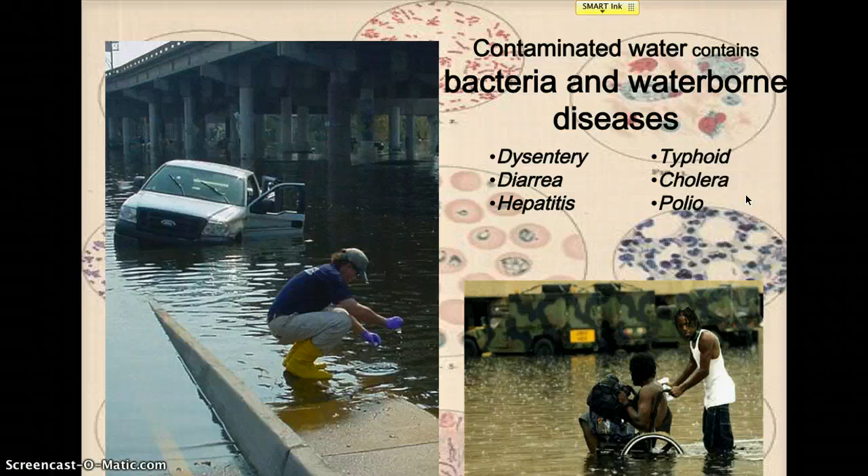And when you've got contaminated water, you've got problems that we're not so familiar with here in the first world. You've got dysentery. I guess we're familiar with diarrhea, hopefully not too familiar, but other places, diarrhea can kill you. All these waterborne diseases, you want to jot this down in your Cornell notes: typhoid, cholera, polio. You can get epidemics, and so we don't really hear about those too much here, but in other places they're killers, and they could easily be avoided.

So why do we need to treat the water? We've got public health issues. We want to be able to go use the water. We want to not be afraid of it. We've got protection of wildlife and ecosystems, and then especially this idea that water can be recycled.

We are scarce on water. We've got a growing population and growing demands for water, and we need to be smart about how we use it. It's like, should we be using Hetch Hetchy drinking water to water a golf course or a park or landscaping? And so maybe there's some ways we can reroute that water. And so the purple pipes are kind of the symbol around here for recycled water.

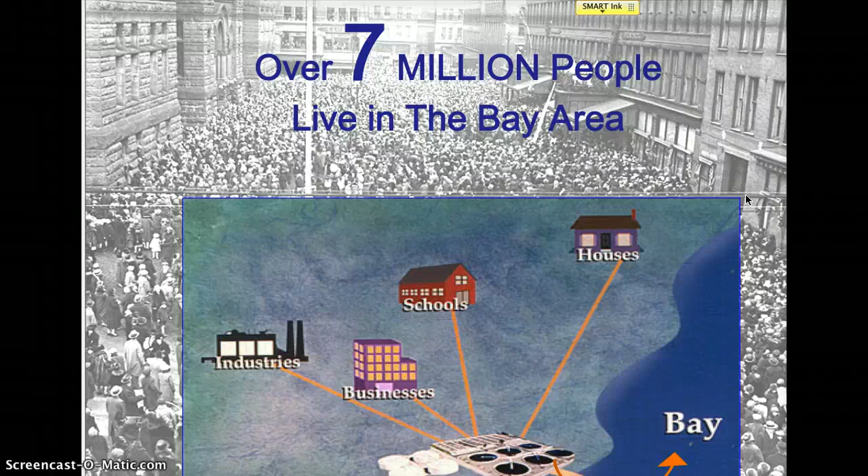So how many wastewater treatment centers do we have here in the Bay Area? 49. There's the number. Why so many? Well, it's because we've got a lot of people, and they're living all over the place. And so 49 different treatment centers to service all. Everybody's using water. They're flushing it. It's going down the kitchen sink, the showers, the drains. And so we got to deal with it. 700 million gallons a day. That's a lot of water. You can imagine what it would be like if we didn't have a system to navigate that.

And so in our neck of the woods, we've got two big ones. The biggest one is down in San Jose. We won't be seeing that one. It treats 167 million gallons a day. Ours treats a mere 29 million gallons a day, which is a lot. How much is it? It's like 29 Olympic swimming pools. Or here's a little for you basketball players out there, 150,000 basketballs would be 1,000,000 gallons. So we've got 150,000 times 29 million a day worth of water coming in. It's a lot.

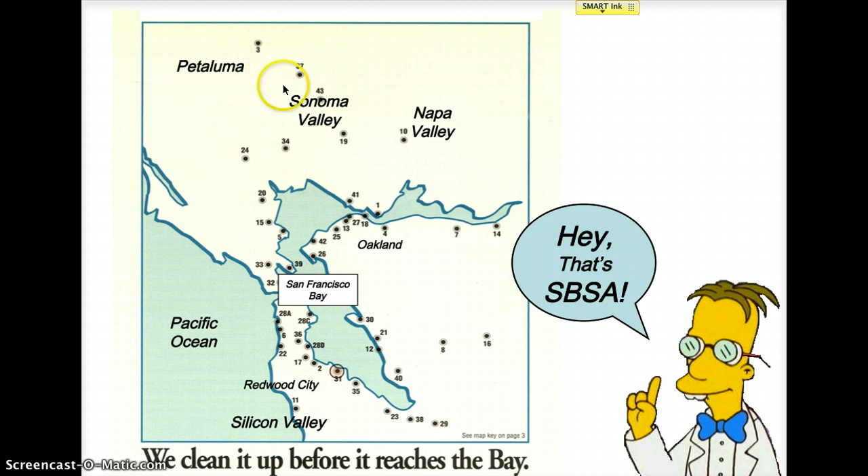And so here's where all 49 of those treatment centers are. Notice that they're all on the water along the bay. If you've got millions of gallons of water coming in, you got to have a place for that to go. And you wouldn't build one of these things on the top of a mountain, right? You're not going to pump it uphill and then have it spill on the other side. So we're right on the water. These ones up here are on creeks and rivers, right? There's got to be a place for that water to go.

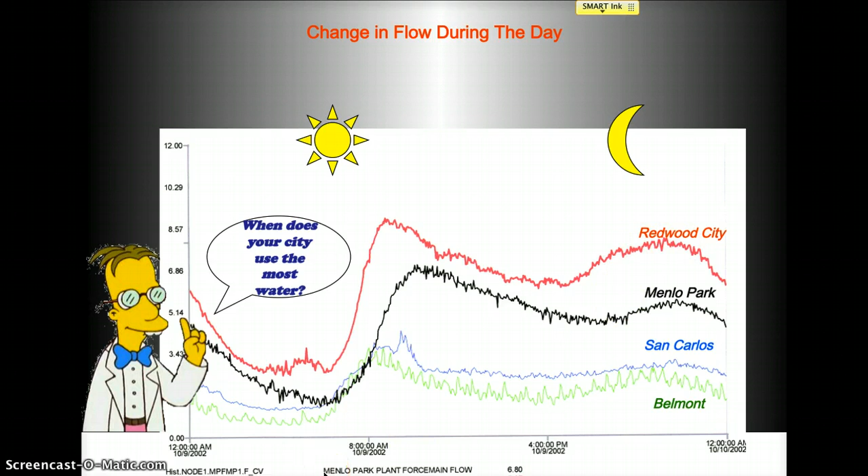And so they get very high tech about when that water's coming in. They got to be ready for it. And so this is kind of interesting. You can see right here, this is time going down here. Here's when we all go to bed, sleeping, not using too much water, and then bam, there goes the alarm. We wake up, go to the bathroom, take a shower, brush your teeth, and the water peaks. Then we all go to work and school, it comes down, and then we all get home and start using more water again. And so they're ready for it every step of the way. They've got to be.

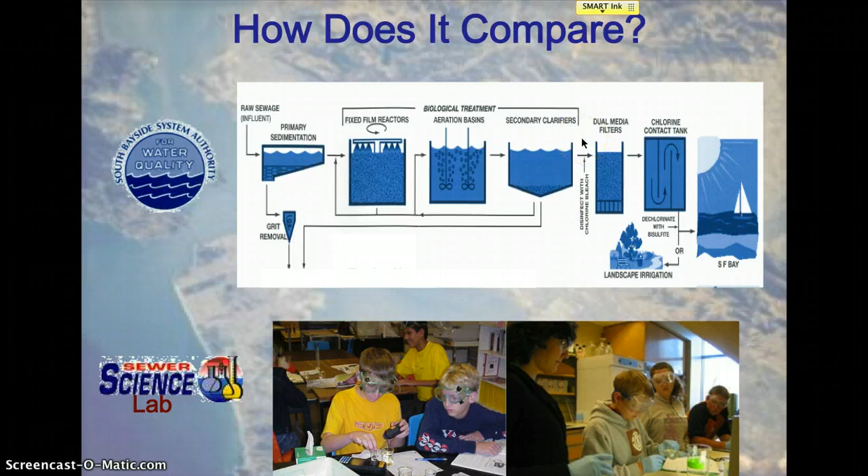So how do they do it? Here's an overview. We've got our primary part here, and then this whole thing's secondary. And so we're gonna get into that right now. So here's what's coming in. It's called influent. That's a vocab word you want to have under your belt. Influent, you can see it's obviously dirty. You can imagine what's in it. Effluent is what's going out. Effluent out, influent in. And that looks a lot cleaner, but it's not 100% clean. You can't drink it. It's about 90% clean, and to get it 100% clean, it takes a lot more energy and it gets more expensive. We'll probably be doing that in the not too distant future. And here's the recycled water going in the purple pipes, even cleaner, but not 100% clean yet.

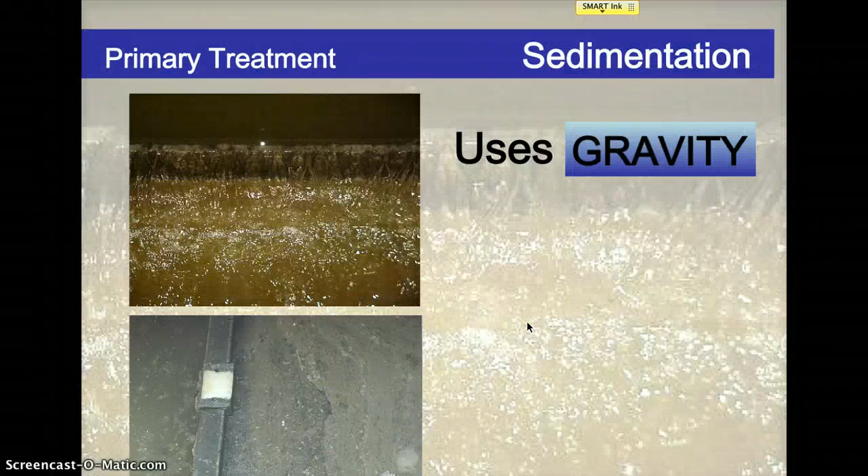Here's what happens. Influent comes in through these big pipes. It comes in fast, and then they stop that water. So here's primary treatment. Primary treatment is essentially they're just using gravity or just physical properties of the waste to try and separate it. So they call it sedimentation. The sediments will settle out. You stop that water, just let everything kind of settle. And then the things that are less dense and insoluble in water, like oil and stuff like that, float to the top. They skim that off. They get all that sediment out, separated, and then they go on to the next stage, which is secondary treatment. Lots of places in the world that flush toilets only do this, and we actually only used to do this until we got a little bit more high tech.

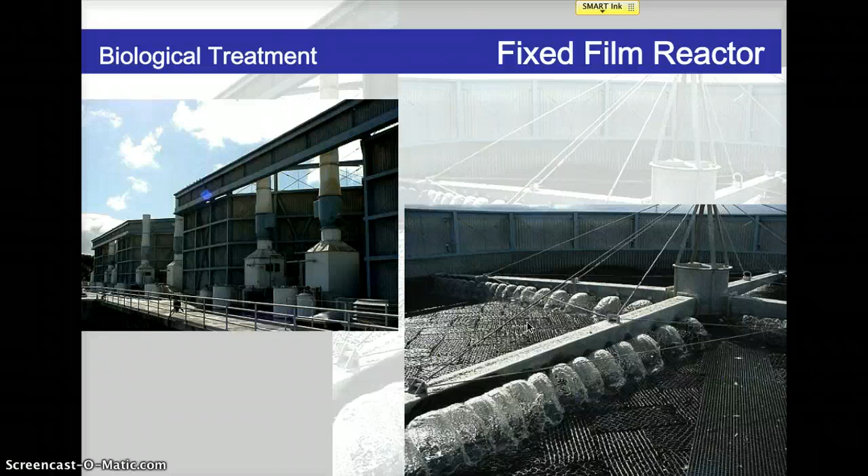This is where it gets cool. So this is secondary treatment now. The water, now it's just liquid water, but it's got all this organic matter that's still in it, and it needs to be treated. And so what they do is all these steps that basically get into allowing what they call activated sludge, which is really a bunch of different types of creatures. Here they're calling it bacteria. It's also little protozoa, and we'll see some of it. There's a whole universe going on in just a drop of it. And so these creatures will do the work for us.

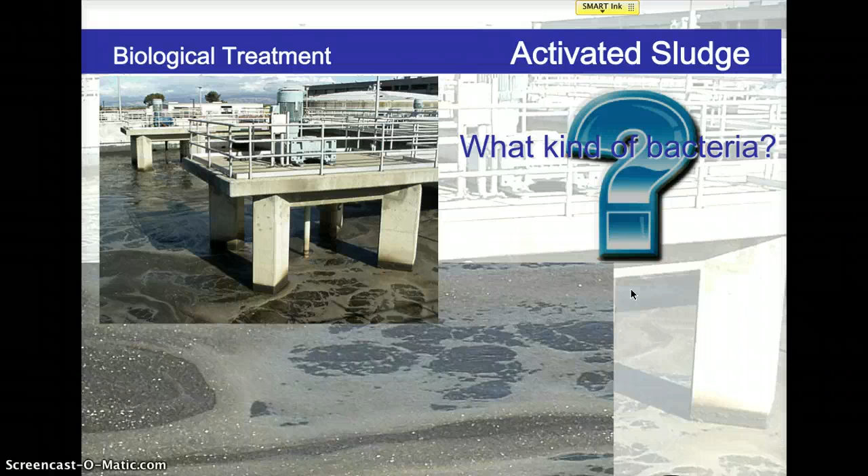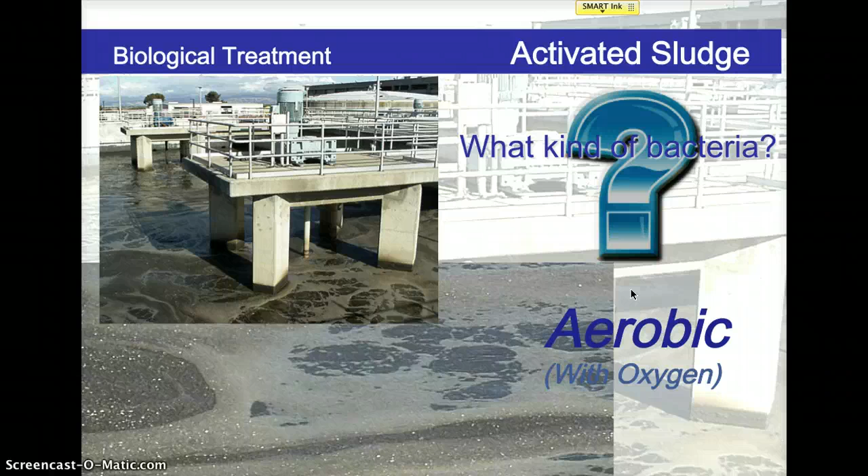And so what we do is we set up the best possible conditions for these creatures to do the work. We pump it full of oxygen, get the water at just the right temperature, get it moving, and let these creatures do their thing. And they digest the organic waste, and they basically take care of it for us. It's pretty cool. So it's a biological system. And then we run it through a couple more filters and try and get it as clear as possible.

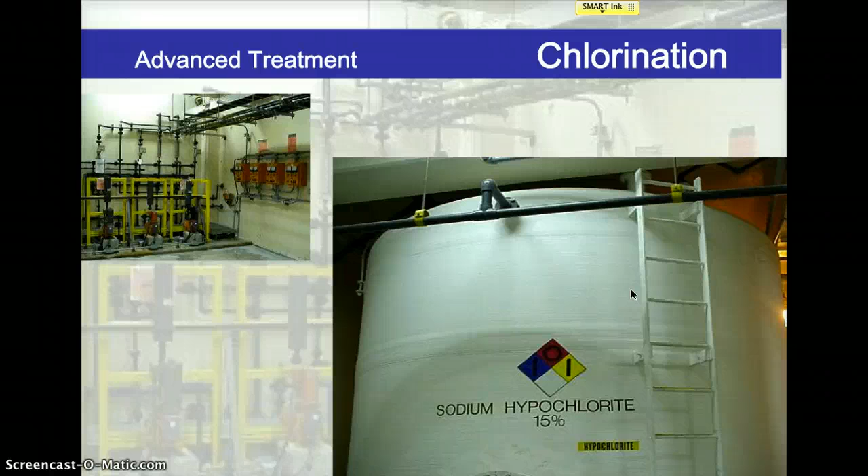Advanced treatment. We'll see this filtered one more time. And then the next step is, we can't discharge all those living creatures, so they basically hit it with bleach, or sodium hypochlorite, for the most part. They hit it with that, kill everything, sterilize the water, but then they can't discharge that. So the next step is they've got to dechlorinate it and get all that chlorine out of there so they don't put that out into the Bay Area.

So then they discharge it. It goes out to the Bay. It's much cleaner. But one thing to recognize is you've got 49 of these places in the Bay Area doing that, and they're pumping fresh water into a saltwater system. And so even if it's clean, that's an issue in and of itself. But there may be ways around it. We need to start thinking outside of the box. But this is our system for now.

The tertiary system would be if we could take that effluent, instead of just dumping it straight into the bay, run it through a wetlands, and let the plants suck up the heavy metals, the stuff in that water that those creatures aren't going to take out. Medicines that get flushed down the toilet and things like that. So if you run it through wetlands, like they do in Pacifica, not too far from here, a state-of-the-art wastewater treatment center, that's the next level. We don't do that yet here, but we could.

So just a quick word about recycling water. Why would we do it? It basically conserves water. Like I mentioned earlier, why are we using drinking water for a lot of these purposes? We pump this pristine water all the way from Hetch Hetchy and then flush it down our toilets. That doesn't make a whole lot of sense. Or water a golf course, or use it to cool a power plant. So we've got to get smarter.

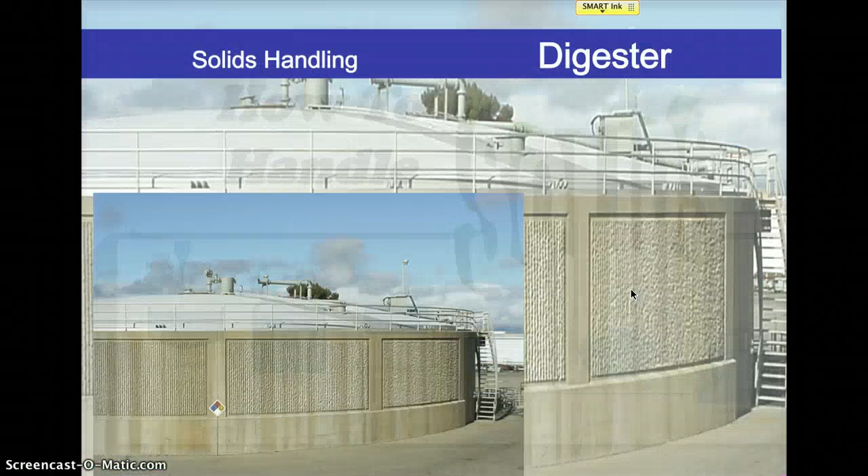Recycled water is part of it, but it takes money to set up all those purple pipes. We'll see those purple pipes and learn more about it when we're there. It's a great concept. All right, keep going. So just to lay it out here, here's what we just talked about. Go backwards. There it is.

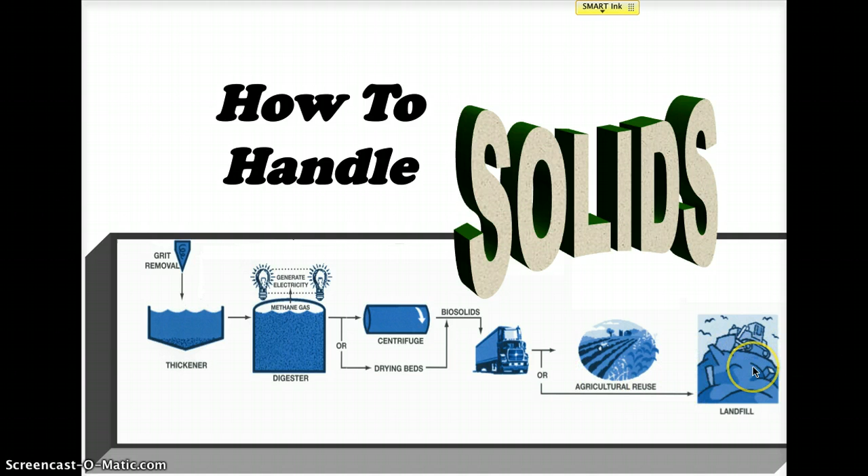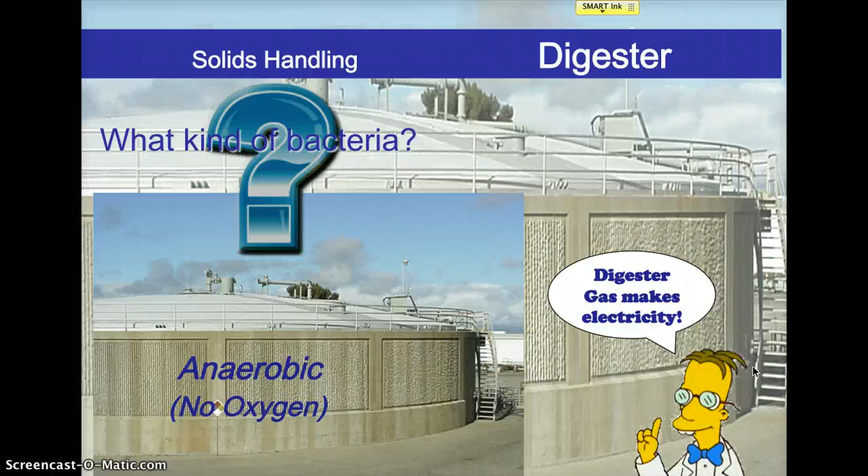So one thing to recognize is we have that solid stuff coming out, that solid sedimentation waste. What they'll do is take it over to the landfill and use it to cap the garbage rather than using soil. Kind of interesting. And then there's a little solid left over. What are they going to do with that? They've got anaerobic bacteria going on, which produce methane gas, and they actually run a lot of their plant off that methane gas. Kind of cool. We'll learn more about that as well.

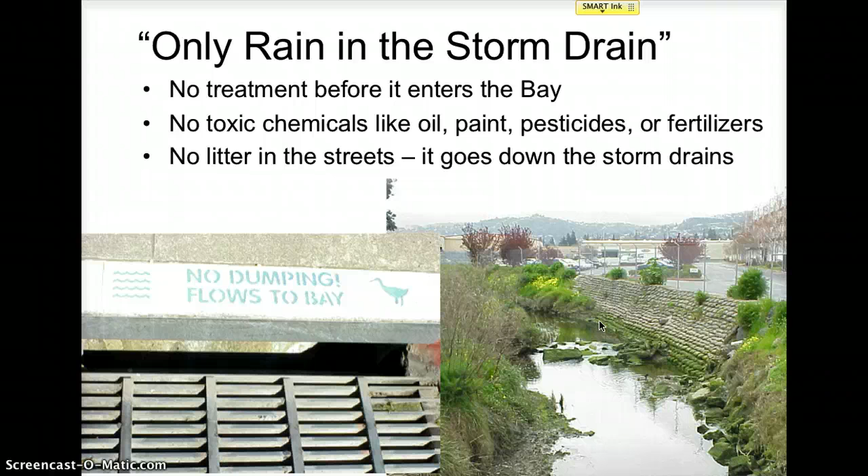So a couple last words here. One distinction to make is anything going on the street, down the storm drains, does not go through this system, unlike in San Francisco, where it's a combined system. Down here, anything going down the storm drains is not treated. So only rain down the drain. We'll be testing our stormwater runoff next week to find out what's in that. We're going to speed up here.

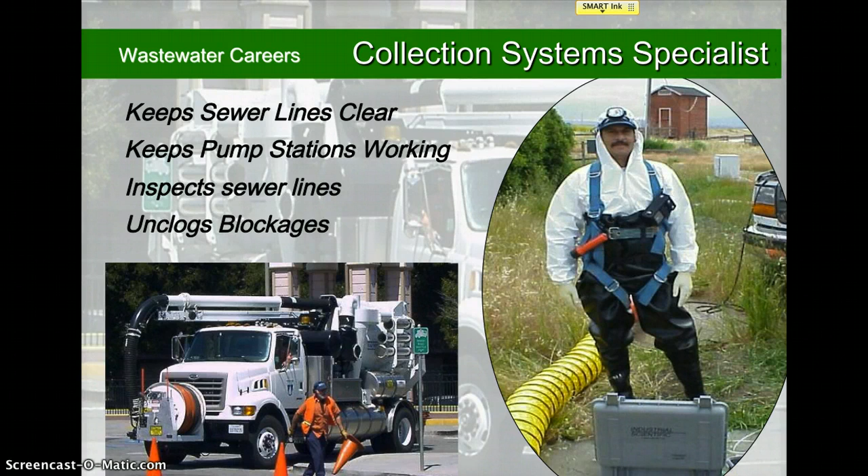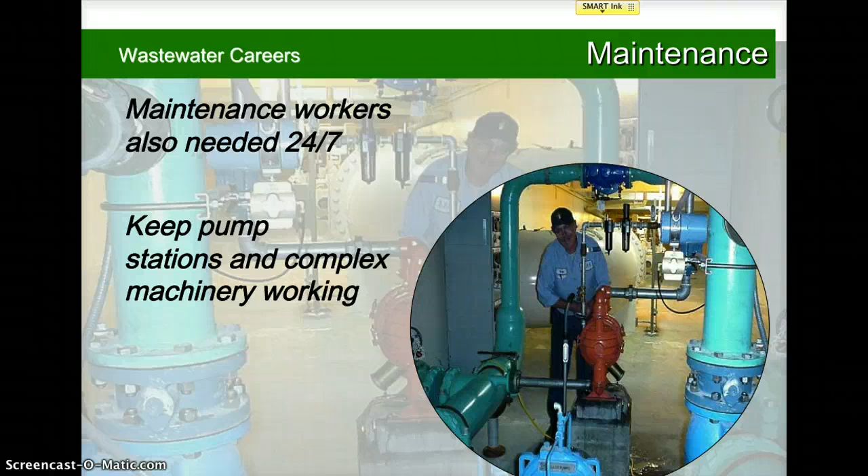Just a couple things to wrap up, and they'll speak more to this when we're there: some career opportunities. There's all kinds of things related to this, and it's not all shoveling poo. They've got a high-tech lab. Some people are out there shoveling poo, and they get paid a lot of money. But there are all different angles on this industry. Wherever there's people, there's going to be waste. And with the water situation in California, we've got things to think about. So keep your mind open to possible careers in this field.